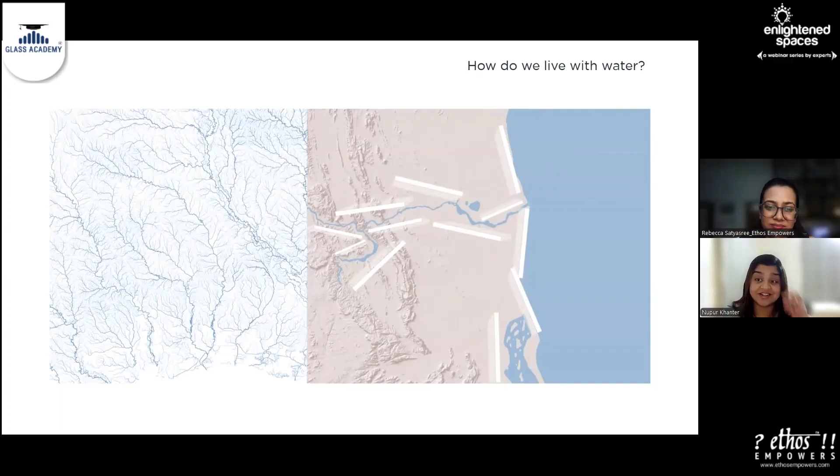For me, water in cities is one of the clearest examples of this—what happens when we erase water from everyday life. And as we're seeing now in the country, even more urbanization is continuing to threaten ecology and so on. But water as an entity has shown it finds its way back spatially, often destructively, reappearing where it was once eradicated.

I grew up in Chennai, a city that experiences both severe flooding and water scarcity. At first glance, these may seem like opposite problems, but they emerge from the same story. Historically, Chennai functioned as a landscape of interconnected tanks and seasonal water systems that expanded during the monsoon and contracted during dry months. So in a sense, they were designed to work with the rhythms of water.

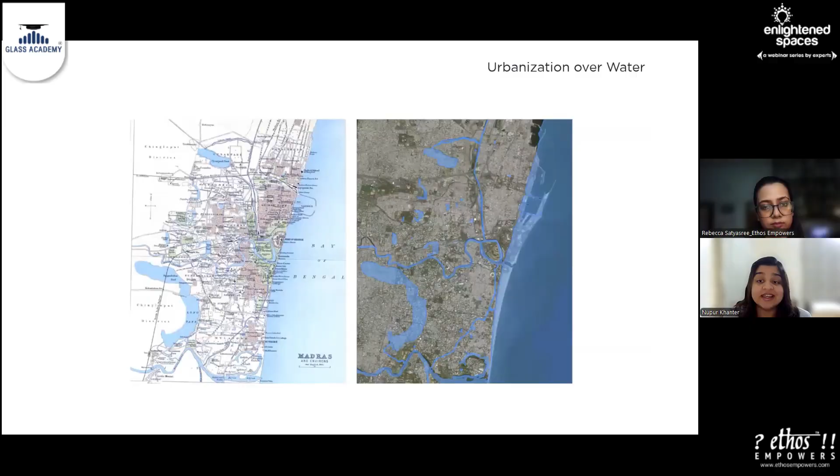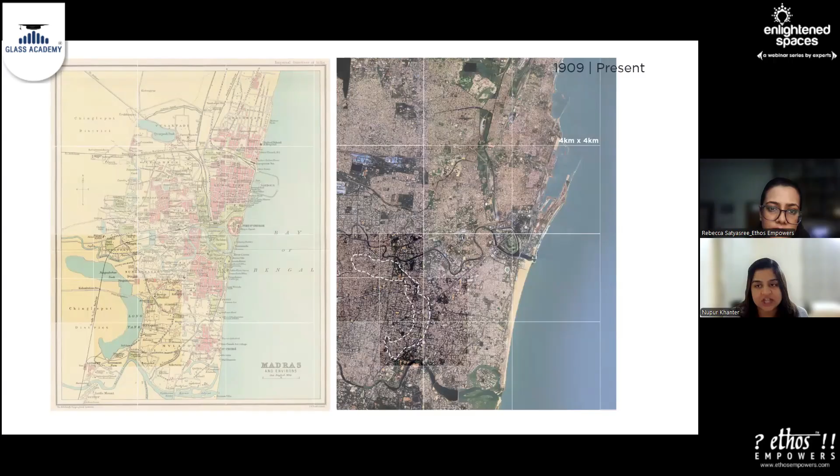However, we see a history of filling and building over these lakes, tragically, in the city of Chennai. This map on the screen shows Chennai in 1909, and you can clearly see the extent of the Long Tank, a major water body that once defined the western edge of the city. Comparing the historical and present day maps reveals how dramatically the landscape has changed. Over time, many of these water bodies have been filled, built over, and disconnected from one another. Water increasingly became something to control, channel away, and keep out of sight.

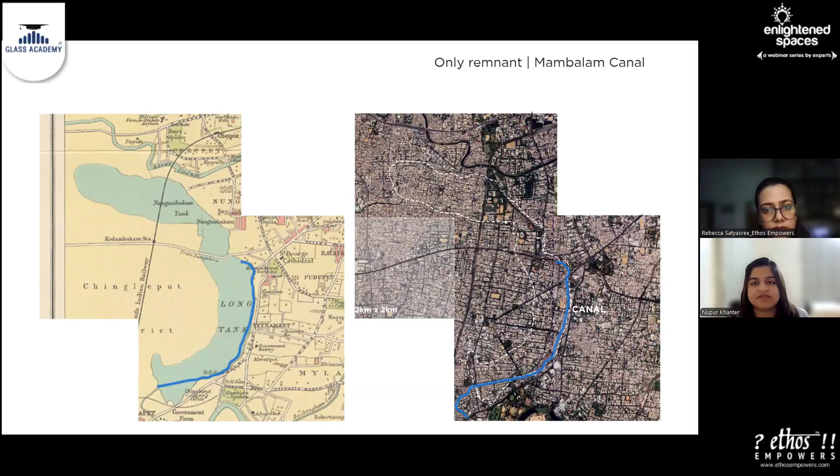One example I wanted to dwell on is the Long Tank, which was a large lake that was once part of Chennai's hydrological system. Today, much of it has disappeared. The Mambalam Canal, mapped out in blue, remains one of the few visible traces of that tank and that history.

Looking through archival photos, you can see that when the tank had water for most of the year, it was also home to the Madras Boat Club's activities. There used to be a regatta and so on. So very much a part of the city's cultural spirit and presence.

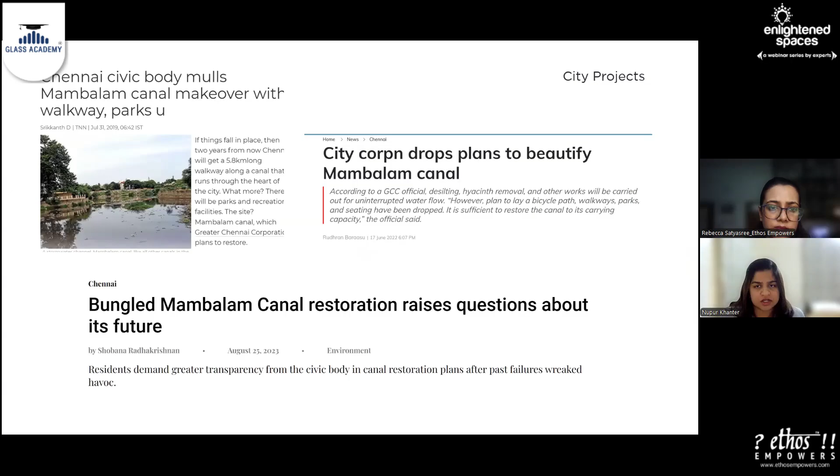Today, this canal is largely disconnected from public life, difficult to access, heavily polluted, and so on. A common story in a lot of Indian cities, tragically. Despite repeated restoration efforts, they have not been successful, and many of them have focused on restoring hydrological function without rebuilding people's everyday relationship with water.

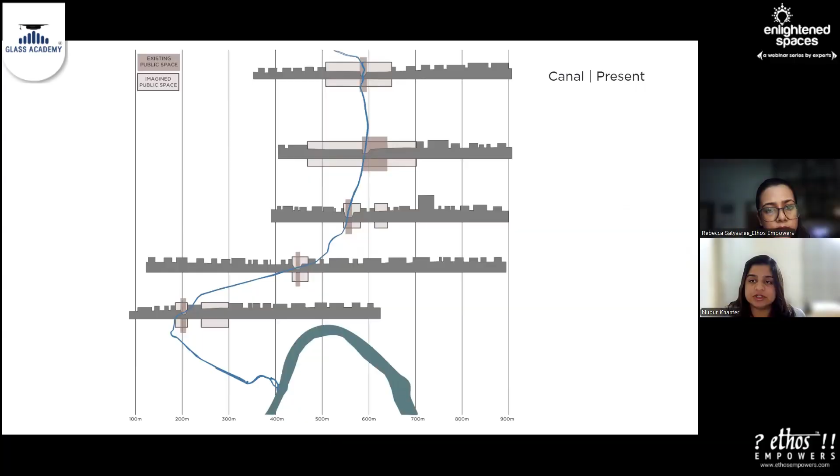So for me, the question shifted from how can we repair this canal, to how do you reconnect a city and its residents with its water? And the canal became a starting point for a broader urban imagination.

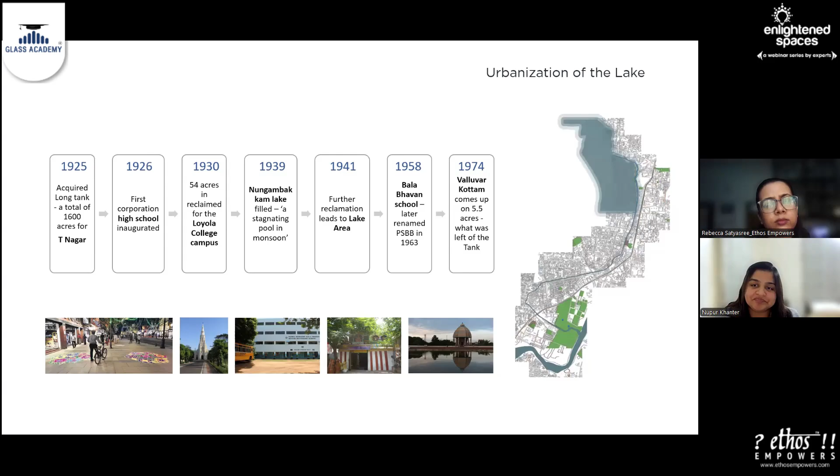This timeline traces how the Long Tank gradually disappeared through successive phases of urban development. But what's important to note is the memory of water remained, even when the water itself disappeared. And what is eventually built on these filled-in water bodies contains traces of what once was. For instance, if you overlay the former lake boundary with current land use, you reveal a trend where much of the reclaimed lake bed was subsequently occupied by schools and colleges, basically institutional land use, which are learning spaces.

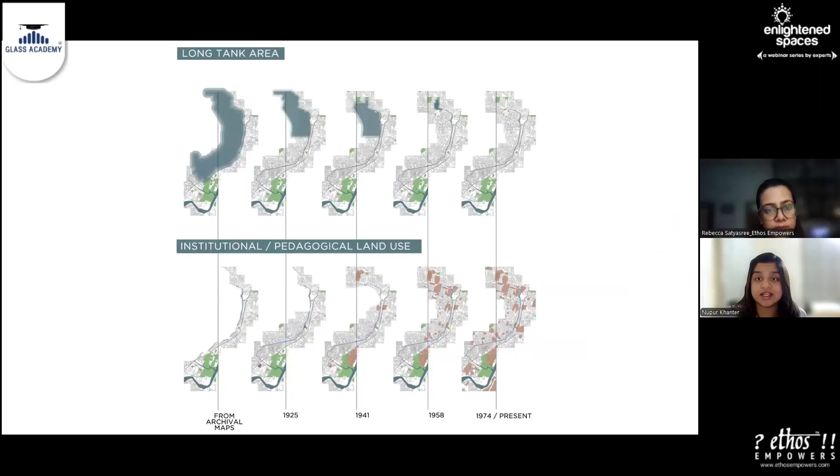At the same time, it's important to note that Chennai's relationship with water is not only physical, it's deeply cultural. For instance, we have this thing called Margazhi Masam, which is an auspicious month in the Tamil calendar, and it hosts the city's famous music and dance season. It takes place during the monsoon, and it's become an important part of the city's identity. So this overlap between seasonal cycles, learning spaces, and cultural events became an insight for me to frame the project.

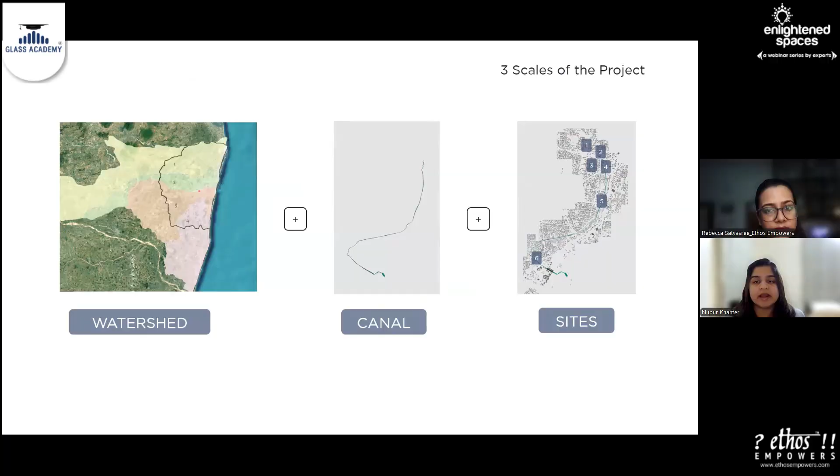This project attempts to read climatic, cultural, and social systems together, and how we can reconnect people to these water systems that sustain the city. The proposal works across three scales: the watershed scale, the canal scale, and then a series of site-specific interventions. This allows local actions to connect back to the larger hydrological systems.

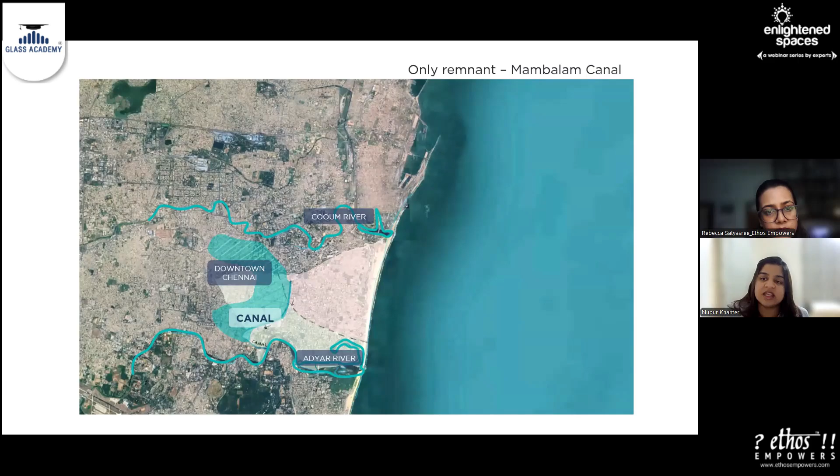At the city scale, this project begins by understanding Chennai's watershed systems. Water does not follow administrative boundaries, and so design for anything related to water must respond to watershed boundaries, not ward boundaries, and hydrological basins and so on. This site sits between the Cooum and the Adyar rivers, making it part of a larger water network rather than an isolated location.

The framing of this project comes from the word Purambok. Historically, this Tamil word referred to shared commons such as water bodies and grazing lands. Today, it's often used as a derogatory term, meaning something is worthless. This project attempts to reclaim its original meaning.

This reclamation is already visible in cultural movements like the song I just played for you, the Chennai Purambok Padal, extremely powerful, and repositions commons as spaces of collective value. Purambok is in your care, it is in mine. The project builds on that spirit of music.

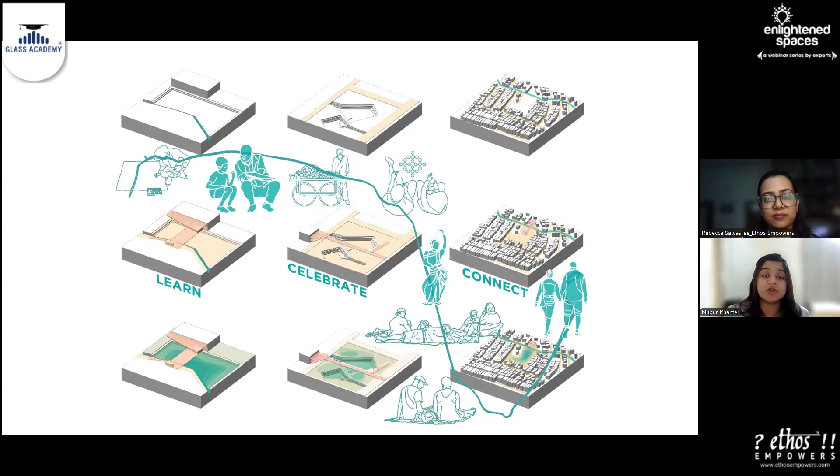At the large scale, this project envisions three relationships that people have with water. The first is to connect, making water visible and accessible in the city. The second is to learn, understanding water as a living system and learning around it and about it. Celebrate, that is, celebrating the seasonal rhythms of water as opposed to treating it as something that has to leave the city as soon as possible. Together, these interventions create a new relationship between water and the people that live nearby. How can we connect people to water, learn about it, and celebrate it?

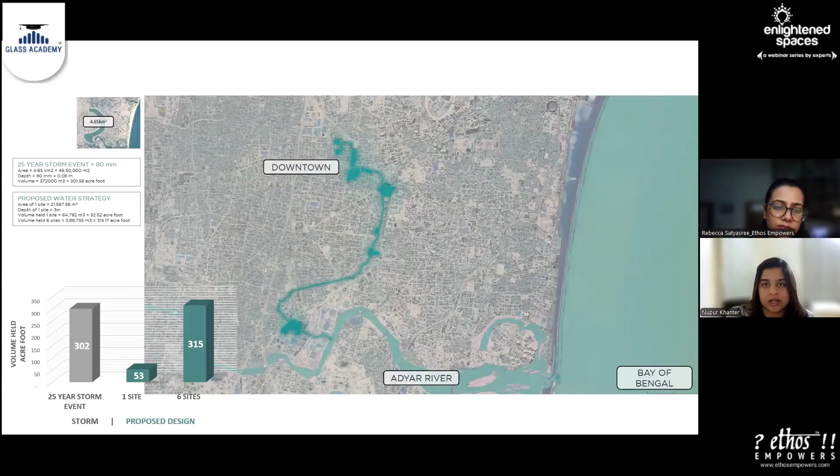So, of course, there's a proposed retention system which is designed to hold volumes of water comparable to a 25-year storm within the study area, because it was a climate and flood resilience project. This proposal reimagines the canal as a visible and accessible landscape. Rather than pushing water away, the project creates space to store, slow, and absorb it while creating public and educational landscapes.

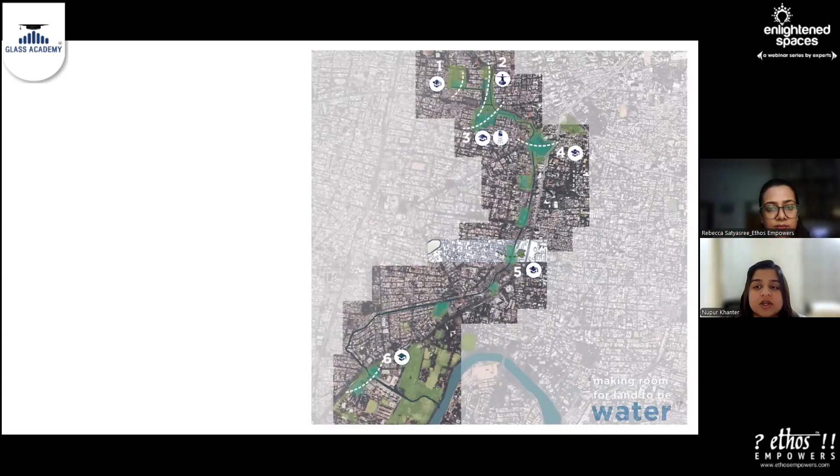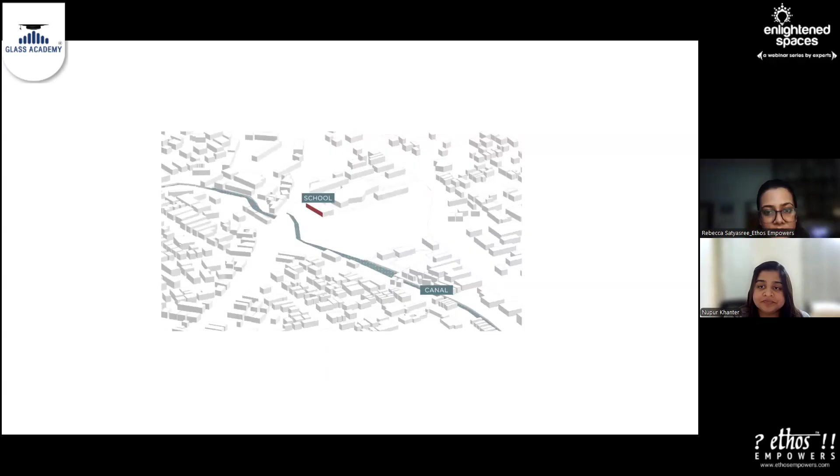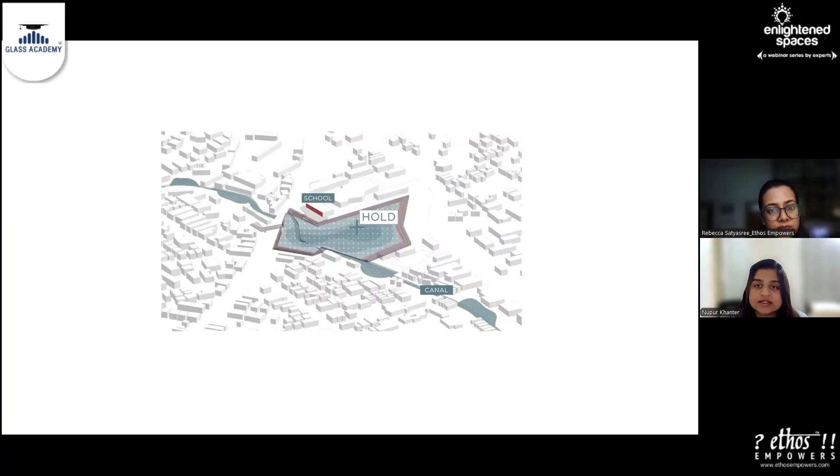At the neighborhood scale, the Mambalam Canal becomes the organizing spine for intervention. It offers opportunities for ecological and public space improvements. The design particularly gives water more space to spread, to slow down, infiltrate the ground, and be stored. So raised pathways, bridges, floodable landscapes, and retention areas create a public realm that works with water rather than against it.

This proposal transforms the existing schools into living laboratories and classrooms for water. Playgrounds become rain gardens and spaces that are recessed down for water to be held. The project also proposes festival grounds and public spaces that reconnect cultural life with seasonal water cycles. For example, the festival that already occurs in that month, how can we sync it to a cultural space that then holds water during the monsoon as well?

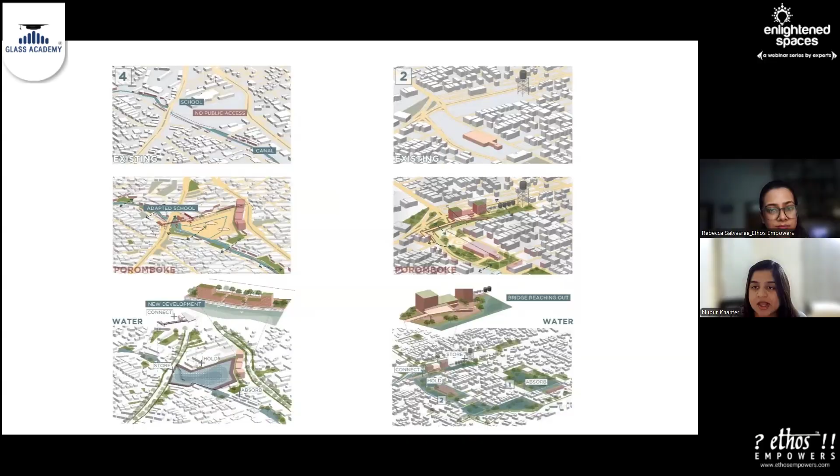Public spaces become places where hydrology is visible and understandable. Through these two sections, as you can see, everything that is yellow is now a public space, and then water becomes something that is visible. So water infrastructure then also helps become educational infrastructure, where you will see the connection and the seasonality of it, something that we don't see in the city today much.

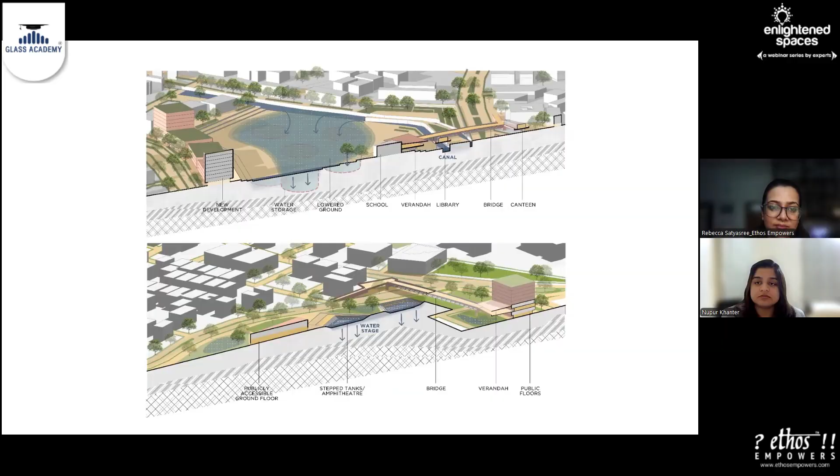Together, these three ideas of connecting, learning, and celebrating form a framework for what I call Poromboke urbanism. Poromboke urbanism reframes infrastructure as socio-ecological and culturally legible. While, of course, this is a speculative design imagining, it is crucial that this vision is not confined to the academic realm. For these ideas to take root, fragmented water governance must bring together multiple agencies, citizens, and institutions, and so on.

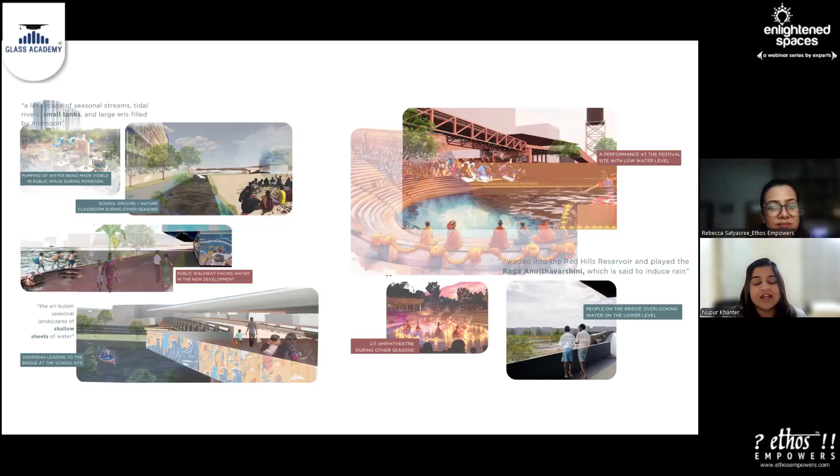In doing so, I hope a Poromboke way of thinking about water can begin to take shape, one that works at the scale of the watershed while nurturing neighborhood level stewardship through local water champions.

Thank you so much, ma'am. Through your presentation, it was so clear about how important research, simulation, and environmental analysis is, and how it leads to informed design decisions. So well presented. Thank you so much, ma'am.

And when it comes to glass performance specifically, what kind of insights from daylight studies, thermal simulation, or spatial analysis tend to most strongly influence your design choices when it comes to your projects?

Yeah, I'm usually interested in the balance between daylight, comfort, and energy performance. So daylight studies help us understand where natural light can improve occupant experience, and thermal analysis helps identify potential overheating risks, especially in a climate like India.

So the value of these tools is that they move design decisions beyond assumptions. For example, of course, we have the standards like North Light and so on, but how can we make more evidence-based choices for the use of glass that respond to local climatic conditions? And I see increasingly with heat becoming such a major issue in India, how can we use glass in buildings to create thermal comfort inside them and make sure that we're using it in the right part of the building, in the right direction, at the right angle, and that we have evidence for those choices.